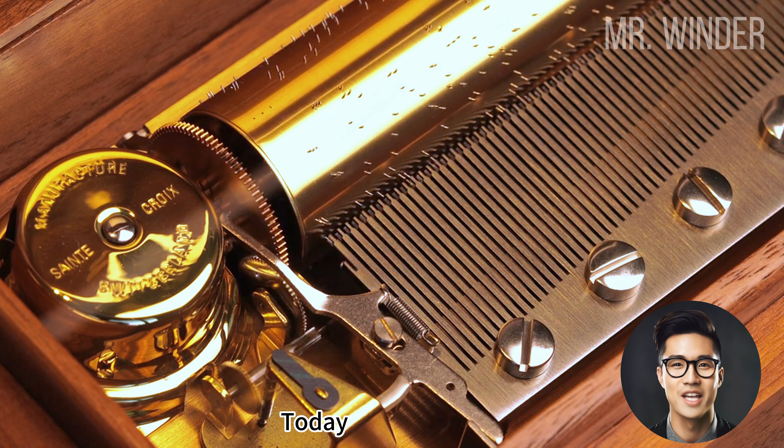We are diving into the mesmerizing world of mechanical wonders with the insightful expertise of engineer Bill Hammack. Join us as we unravel the secrets behind the enchanting melodies of a wind-up music box.

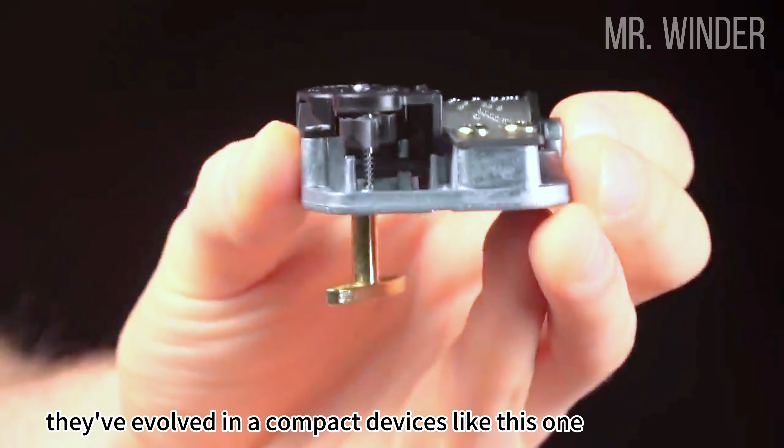Automated music boxes began as cumbersome sets of bells struck by hammers, but over several hundred years they've evolved into compact devices like this one. I'm sure you know how it works: wind it up, and it plays a tune.

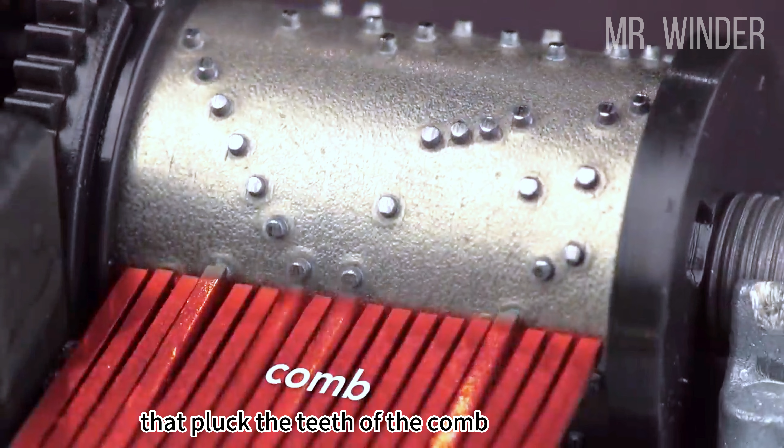The melody is programmed on this rotating drum. The drum has protrusions called pins that pluck the teeth of the comb. The comb is a piece of steel with 18 teeth, each a note. Longer teeth are lower notes, and shorter teeth are higher notes. The comb works like a multi-pronged tuning fork.

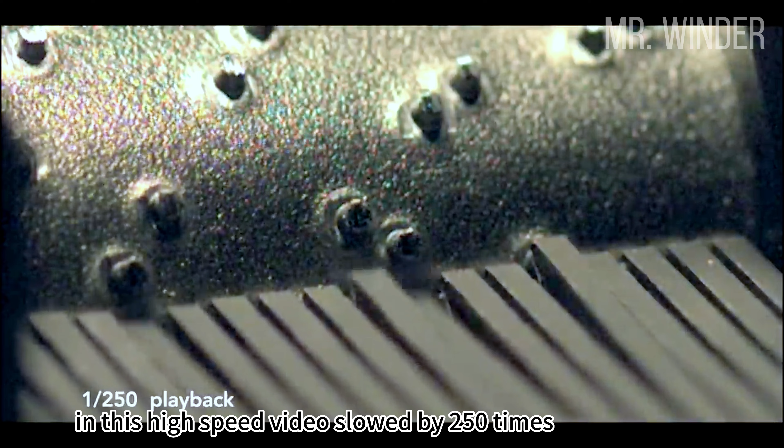In this high-speed video, slowed by 250 times, the drum appears not to move, but you can see the teeth vibrate. The shorter tooth vibrates faster than this longer one. These vibrations produce the sound.

The teeth are like this saw blade. When it's longer, it produces a lower note when plucked, and when shorter, it produces a higher note.

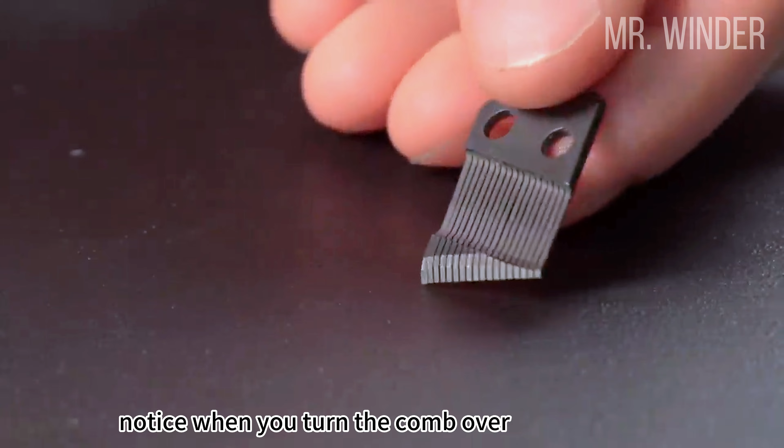Notice when you turn the comb over, the teeth don't have the same thickness. The longer teeth, the lower notes, are weighted more on the ends. This added weight lowers their resonant frequency even farther. Here, I taped a lead weight to the end of the saw blade, and it produces a lower note than without the weight.

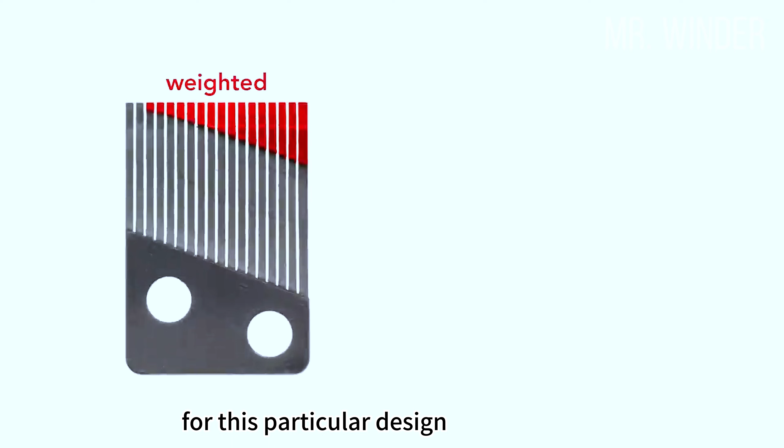Because of this weighting, the comb is more compact. For this particular design, if the comb were unweighted, it would have to be roughly 40% longer to produce the same range of frequencies. Another advantage of the weighting is that combs can be mass manufactured in a single size—you just cut away the proper amount of material to produce a unique set of notes.

For example, although each comb has 18 notes, the specific notes vary for a particular song. Here's a music box playing London Bridge with a comb specifically designed for this melody.

And now here it is with a comb cut for a different melody, This Old Man.

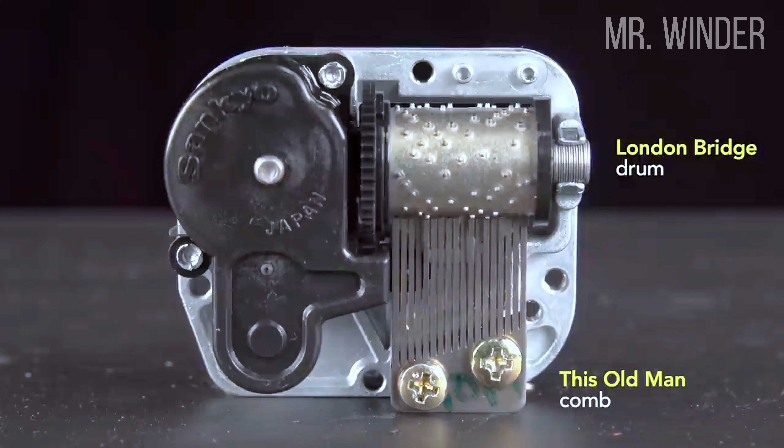The timing is the same, but the notes are different, and it sounds odd. The difference in weighting is so subtle that these two combs are indistinguishable by eye.

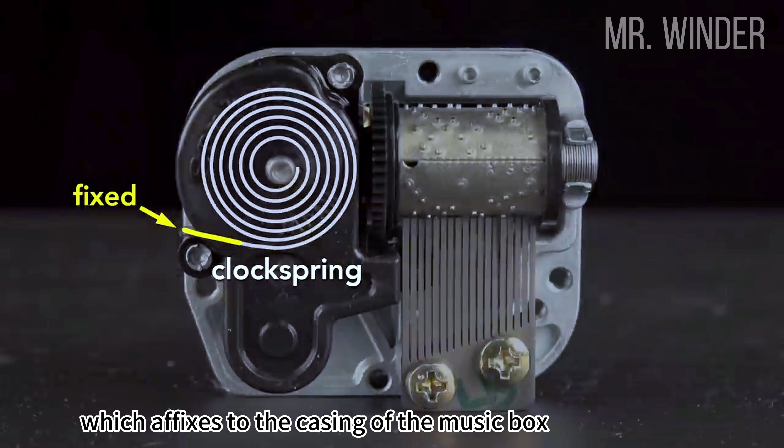Inside the casing of the music box is a clock spring. It's a coiled strip of steel that is 40 centimeters long, unwound. The outer end of the spring has a T-shape which affixes to the casing of the music box and holds it in place. The inner end of the spring has a slot, which hooks into a notch on a metal shaft.

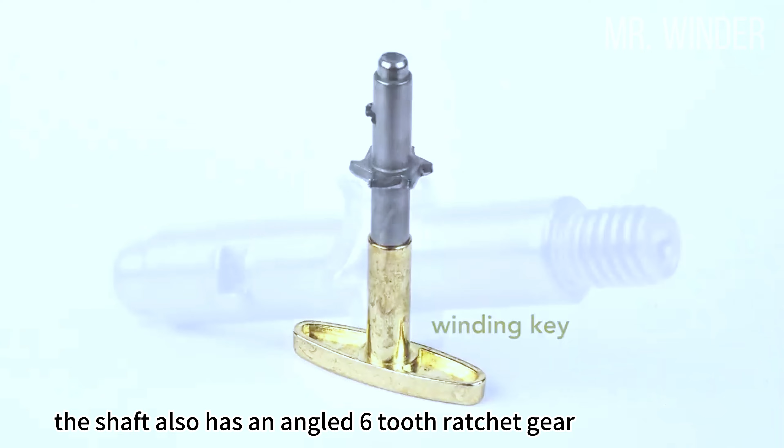This shaft is attached to the winding key. The shaft also has an angled 6-tooth ratchet gear. This gear fits inside this larger plastic gear. On the inside, there are 4 flexible pawls so the axle turns independently from the plastic gear.

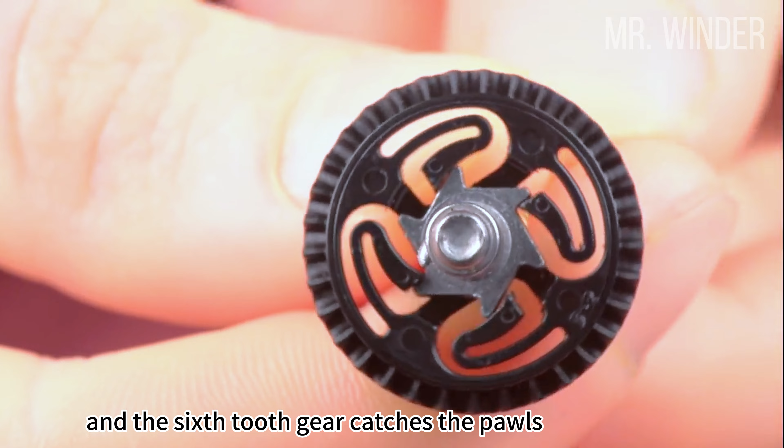This happens when the music box is wound. When the spring unwinds, the axle turns in the opposite direction and the 6-tooth gear catches the pawls, which rotates the larger plastic gear with it. This rotation drives the music box.

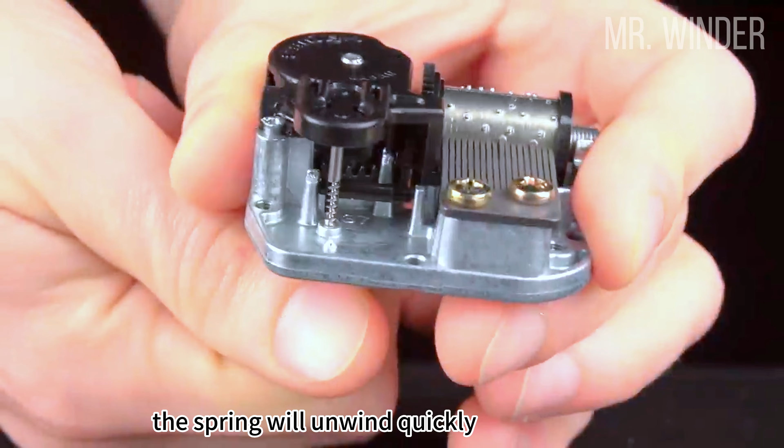As the spring unwinds, it rotates this bevel gear, which engages a second bevel gear affixed to the drum. But there's a problem with this setup: the spring will unwind quickly and the music will play too fast.

This piece, called the governor, solves this problem. It's connected to the drum by a gear train, which is compactly built into the music box. The rotation of the governor controls the speed—stop the governor and the drum stops. The governor uses air resistance to control the release of energy from the spring.

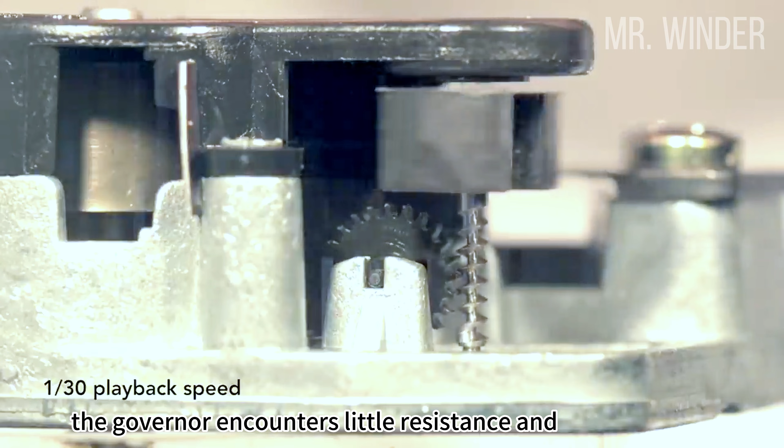Air resistance is proportional to the velocity squared of the object. When started from rest, the governor encounters little resistance and speeds up readily, but when it spins rapidly, over 3,000 revolutions per minute, air resistance swiftly increases, preventing it from moving much faster. This action limits the speed of the governor and the rotational speed of the drum.

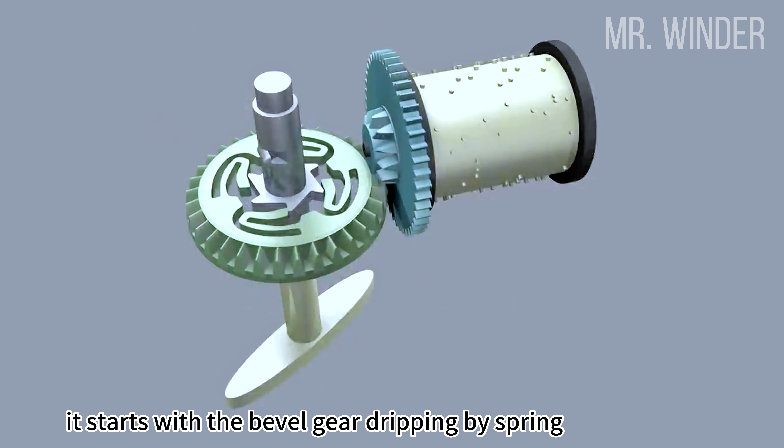To spin the governor so fast, the music box uses a multiplying gear train. It starts with the bevel gear driven by a spring, which engages a smaller gear on the drum. This multiplies the rotational rate by the ratio of the number of teeth on the larger gear to the number of teeth on the smaller gear, here 2.75 times.

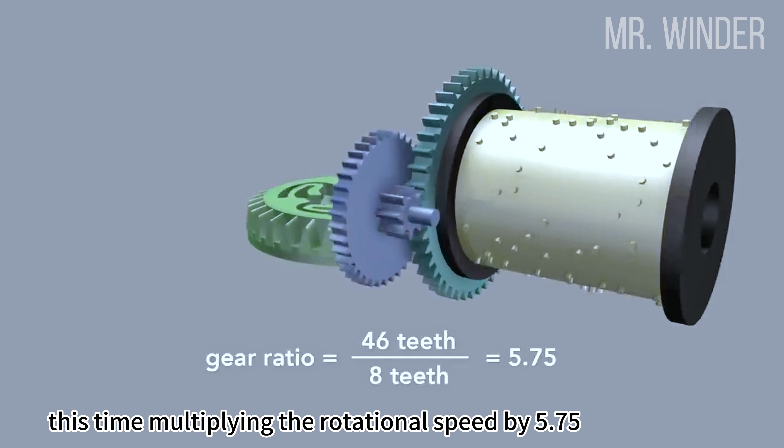The drum is also affixed to a larger gear, which engages another smaller gear, this time multiplying the rotational speed by 5.75 times. The larger gear on this piece engages the smaller end of another spur gear, further multiplying the rate by 6.3 times. Lastly, this spur gear engages a worm screw on the shaft of the governor.

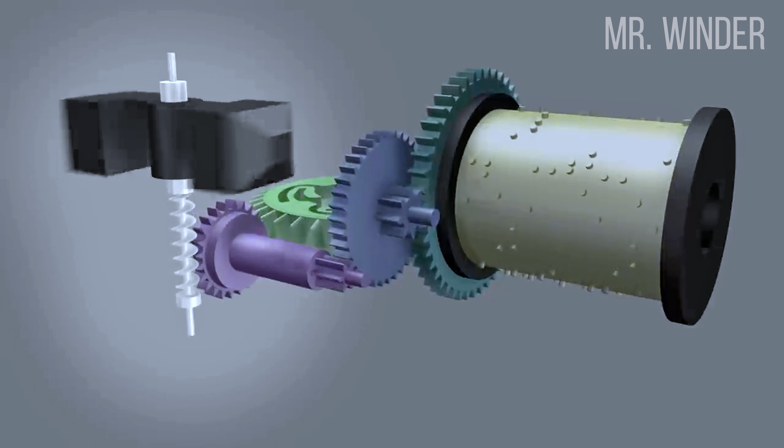It moves so fast it's blurred. Here, slowed down by a factor of 30, the movement is visible. The gear that engages the worm screw differs from the other gears. It has curled teeth, and the shape of these teeth allows it to better engage the screw.

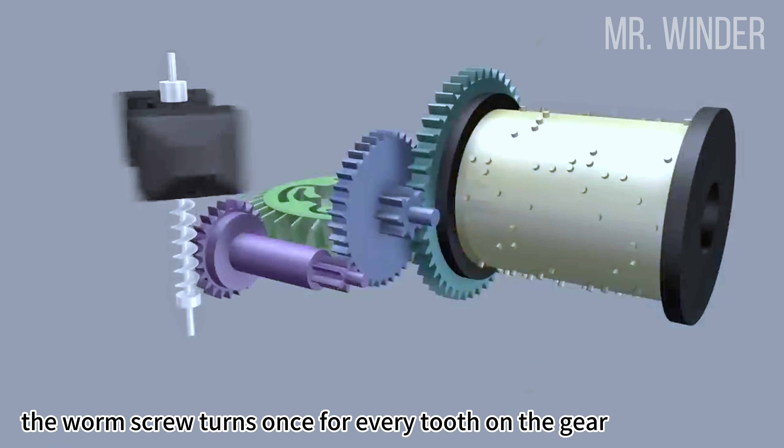The worm screw turns once for every tooth on the gear, and since there are 24 teeth, it multiplies the rotational rate by 24 times. This means that for every single revolution of the first bevel gear, the governor rotates 2,400 times. Since the first gear rotates roughly 1.5 times a minute, the governor spins at 3,600 revolutions per minute.

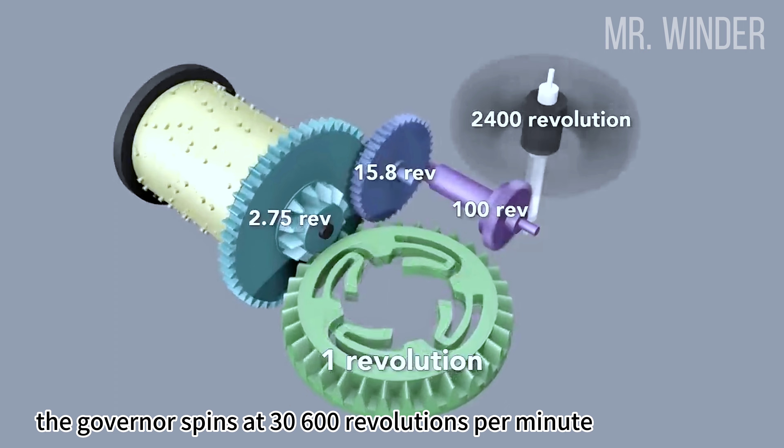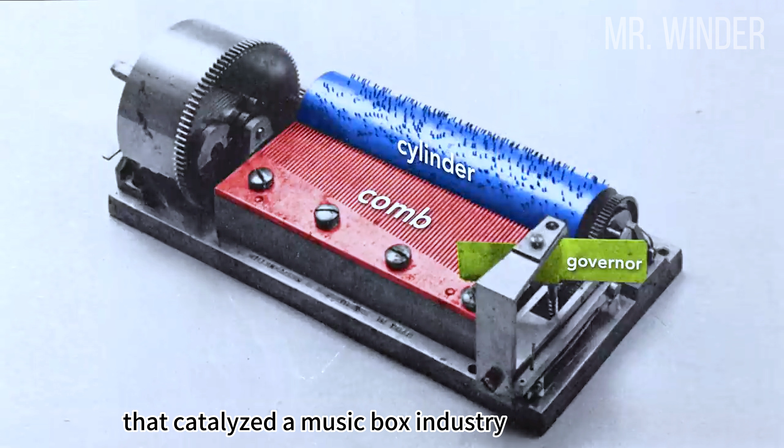As I noted, this music box evolved from devices that used bells struck by hammers. The replacement of these bells with a comb was the technical breakthrough that catalyzed a music box industry that blossomed in the 19th century. The compact comb movements were built into snuff boxes, clocks, and large pieces of furniture.

As the industry flourished, music boxes grew more complex. Some, for example, sported dual barrels and combs, which played simultaneously to produce rich harmonies.

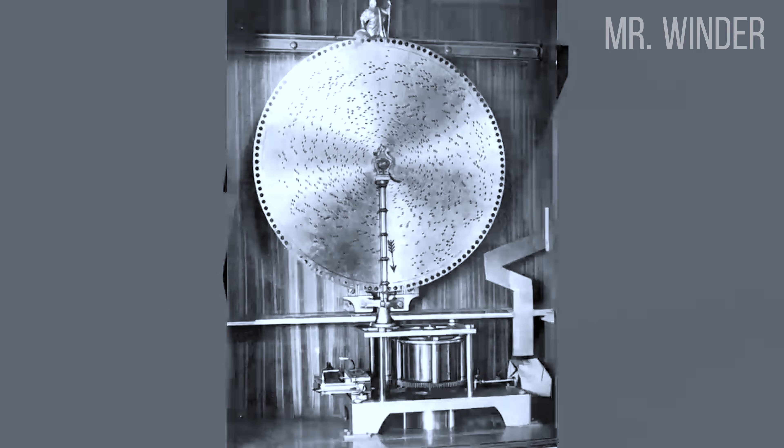The first music boxes used cylinders, but were superseded by boxes that used discs, which could be easily changed. Here, the melodies were punched into a metal disc. With this innovation, music boxes shrunk and their cost declined.

For 100 years, music boxes were the way a family listened to music in the home. But by the turn of the 20th century, the phonograph and radio had displaced them. Music boxes were shoved into attics or, more often, left to rot in junkyards. These modern music boxes, then, are a charming vestige of a past filled with brilliant engineering and craftsmanship.